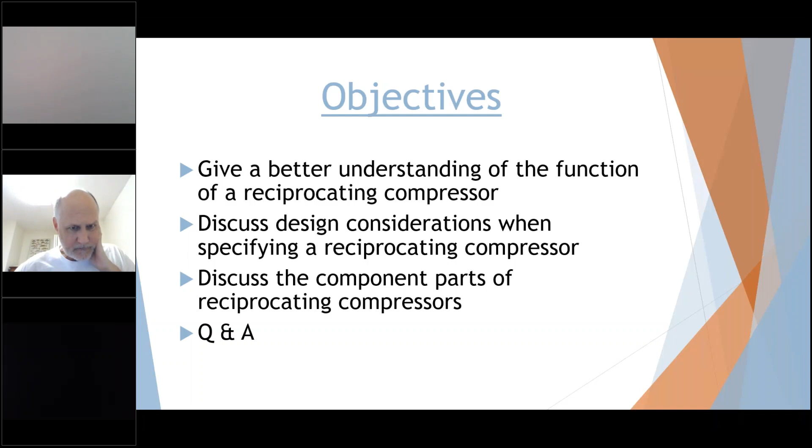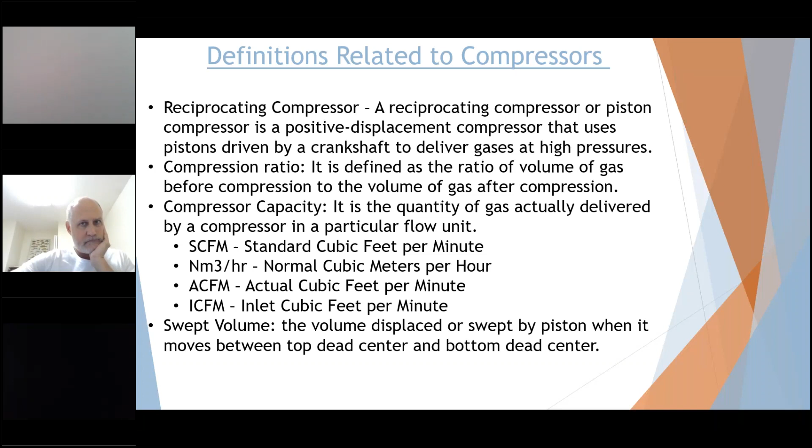So this is going to be a little wordy, but we're going to just briefly touch on some definitions related to compressors. A reciprocating compressor, or piston compressor is another name for it that you may hear, is a positive displacement compressor that uses pistons driven by a crankshaft to deliver gases at pressures higher than what they began at. Another term that you'll hear frequently is compression ratio. It is defined as the ratio of volume of gas before compression to the volume of gas after compression. So you'll hear something like this is a 3-to-1 ratio. That's 3 parts compressed into 1 part.

Briefly touch on compressor capacity. There's a lot of numbers and units that get thrown around here. The definition is it's the quantity of gas actually delivered by a compressor in a particular flow unit. And I touch on some of the more frequent ones. There's many more than this, but the one that we use the most here at Hycomp is SCFM, standard cubic feet per minute. That's somewhat self-explanatory, but it's cubic feet per minute, and then it's referenced back to standard conditions.

Another one you see quite a bit is normal meters cubed per hour. That's a similar concept of flow, but it's cubic meters per hour, and then it's referenced back to normal conditions, which is similar to standard conditions, but a little bit different. And that's tied back to the metric system.

Another one you'll hear is just plain CFM or ACFM. ACFM is really kind of a better term because it's less confusing. When you hear somebody say CFM, is it SCFM, is it ACFM, is it ICFM? So ACFM is actual cubic feet per minute.

One thing you have to remember: when you say I need X amount of ACFM, you also need to qualify that with the pressure at which you're talking. So sometimes you'll be talking, I need 10 ACFM at the inlet, which will lead into our next definition, or you say, I need 10 actual cubic feet to this particular machine, so that would be at discharge conditions.

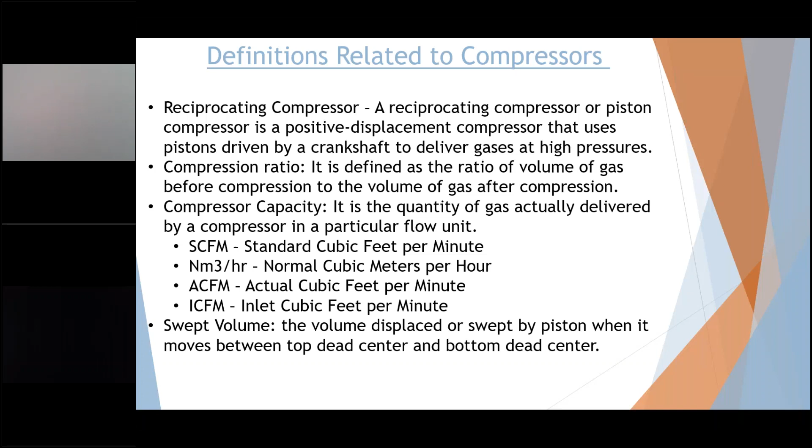Briefly, we're going to put our recips in context of where they fit within compressors. There's two main categories of compression. There's positive displacement, which operate by trapping a specific volume of air or gas and forcing it into a smaller volume. Two basic examples of positive displacement are rotary compressors, where you have a volume and then the lobes come closer together towards the end, and that's what creates the compression, and, as we've talked about, reciprocating, which we're going to go into more in depth.

And then there's centrifugal type, which operate by accelerating the air and converting the energy to pressure. Two basic designs of that are a centrifugal and an axial. Both work somewhat similarly, in that they're spinning at a relatively high RPM, and that high RPM and the shape of their vanes, there's quite a few design considerations we're not going to get into too deep, but that's what generates compression.

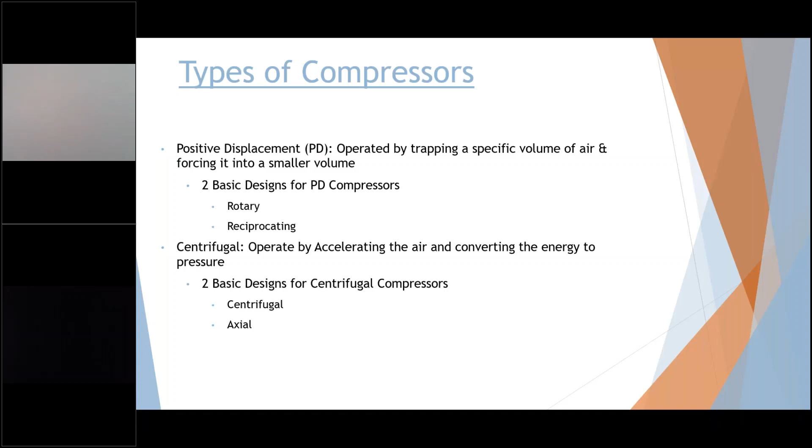So we're going to dive a little deeper here into reciprocating compressors. I do have some graphics on this, they're fairly large graphics, so they're on the next slide, but remember this, and then we'll talk about it on the next couple slides in the graphics.

In a reciprocating compressor, a volume of air is drawn into a cylinder, is then trapped, and then is compressed by a piston. The piston goes up reducing that volume, and that air eventually leaves the cylinder into the discharge line. The trapping occurs because the cylinder valves control the flow of the air through the cylinder. These act as check valves or one-way valves. So you'll have a valve on the inlet side and a valve on the discharge side that operate one way, opposite of each other.

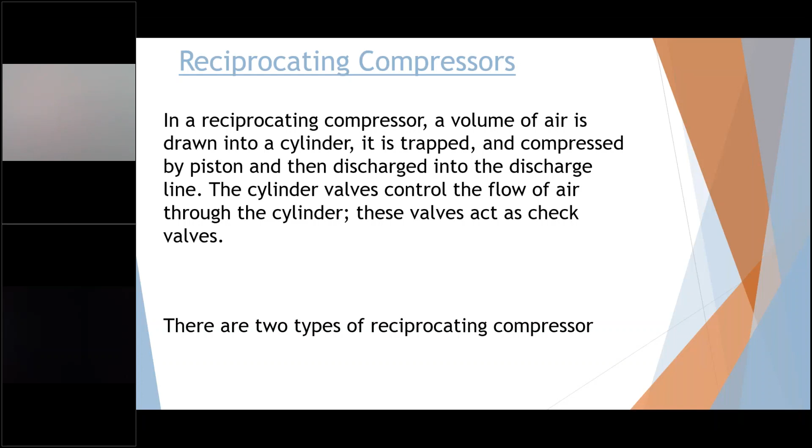There's a couple different types of reciprocating compressors. There's single acting, which is when the compression event happens when the piston goes in one direction, most of the time towards the head and away from the crankshaft. And then there's a double acting compressor, where the compression event happens in both directions. So on the upstroke, you're compressing towards the head end, and on the downstroke, you're compressing towards the crank end.

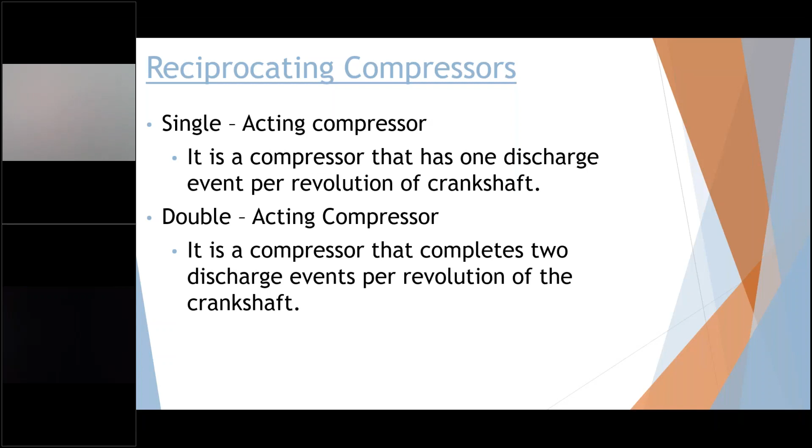And there's some advantages to double acting a compressor, and there's some physical design considerations that sometimes are a disadvantage when you're talking about a smaller compressor.

So here's our diagram. Let me see if I can get a drawing tool here and make a little... So as that piston goes down, we draw gas in through this suction line, and this representation of the suction valve, it draws open based on the differential. That piston then drops down, and we fill this volume with gas, and then the crank goes to the other side of the crank, I should say.

That piston then goes back up towards the head, and this volume from here is pushed and squeezed into this smaller volume, at which point that discharge valve opens and our gas leaves at a higher pressure. There's some important parts that this diagram is pointing out. We have our piston. Our piston's an important part of that. Our rings are also an important part of that. You need something that allows that volume to be sealed against that cylinder wall, so that if it isn't, then you're just blowing gas around everywhere that you don't want it.

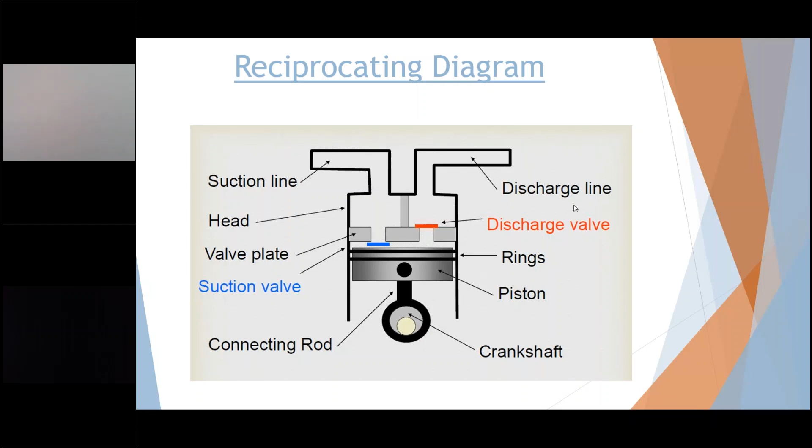And then as that piston starts to come up, that pressure inside the cylinder will elevate slightly, which will then close that suction valve. And then at another point, it will rise enough that it opens that discharge valve. And then we're pushing that compressed gas at the higher pressure into the discharge side. One effect of compression is it does generate heat, and that's caused from the actual compression. As you're adding energy to compress that, there's also energy that leaves the gas, and that energy shows up in the form of heat.

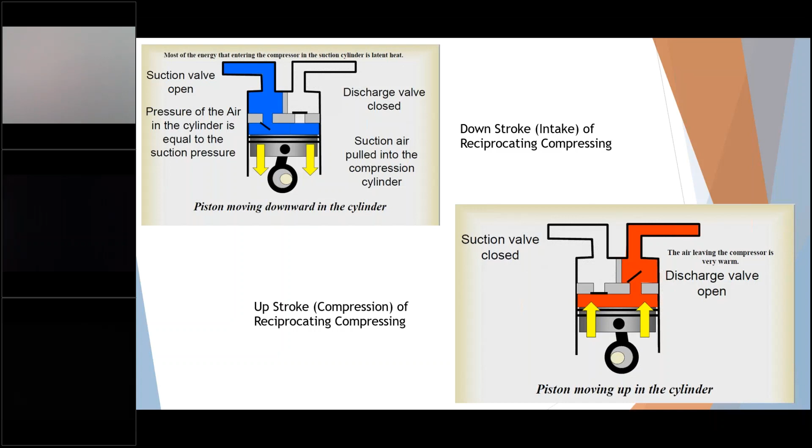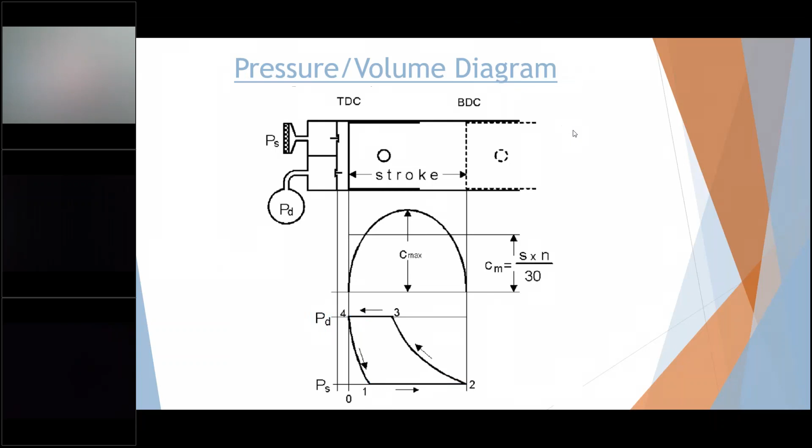So the way to get around that and to work around that is to do a multi-stage configuration where we do that same kind of thing. We run gas into our first stage cylinder, compress it, and run it back out. But then we do that in a set approach.

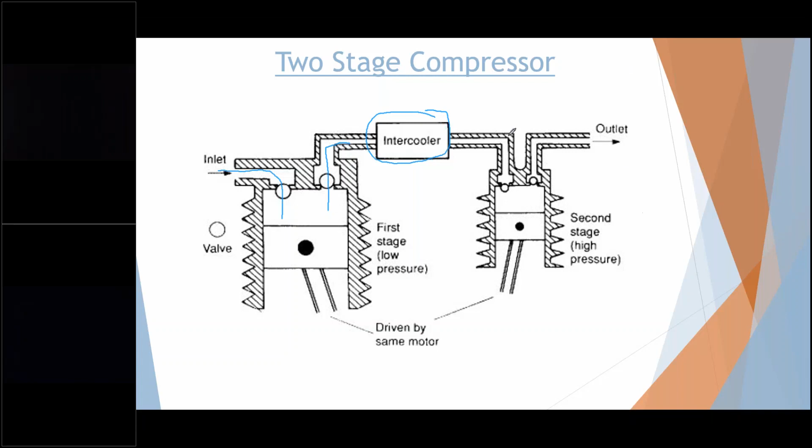And then rather than going from 10 to 1,000, we're now going from 150 to 1,000 here on our second stage. That second stage diameter should be smaller because we already reduced the volume once, and so we need to continue to reduce the volume. Otherwise, we just re-expand if we try to use the same size cylinder. And so there's efficiency gains, as I talked about.

It allows your valves to operate within normal reason. You get rid of some of that temperature in between, so that you're not dealing with such high temperatures, which allows for selection of more standard materials, and many things. So sometimes you may talk to us and we'll go, hey, I think that's probably going to take 3 stages, or that may take 4 stages, depending on what the compression ratio is.

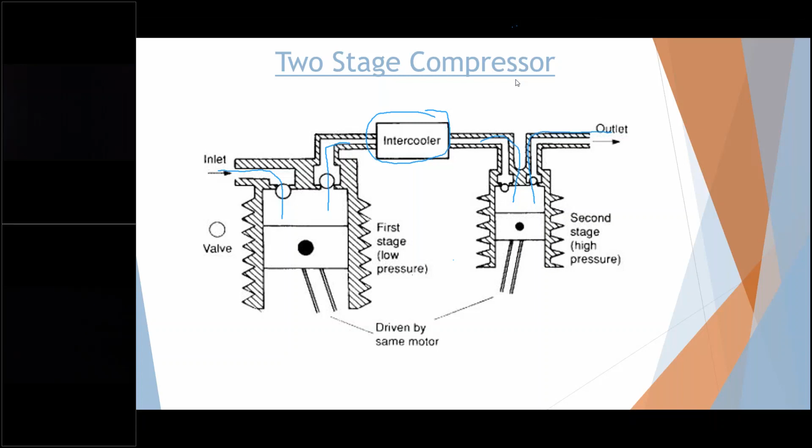So kind of recapping the advantages of multi-staging, there's a reduction in power required to drive the compressor. That's due to those increased valve efficiencies. We're not spending a bunch of time filling a cylinder and compressing without leaving the cylinder. It allows for a better mechanical balance across the unit.

Increase in volumetric efficiency, that's what I was talking about, where it takes a long time for that valve to open, a long time on the suction and a long time for the discharge valve to open. The sooner those open, the higher your volumetric efficiency is. Volumetric efficiency, the definition is how much volume you get out of the cylinder relative to how much volume you put into the cylinder.

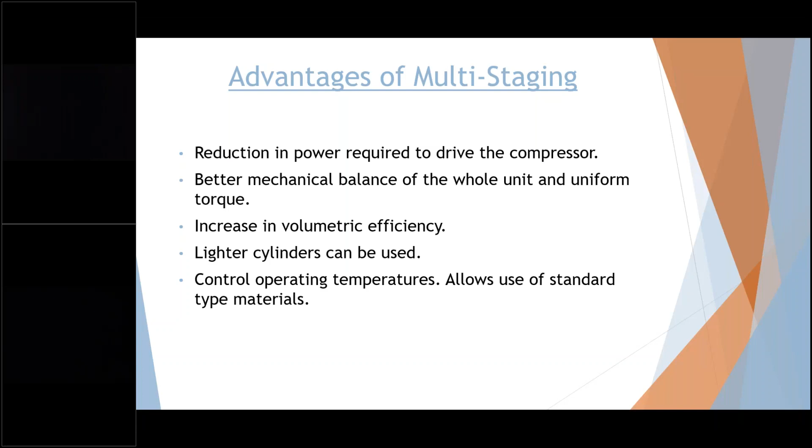There's always going to be a little bit of loss because you have the distance between the cylinder and the head and things like that. As I mentioned, lighter cylinders can be used, more standard materials, and it controls the operating temperatures. So now we'll just briefly put those principles and things we learned and show a little bit how they are on a Hycomp compressor.